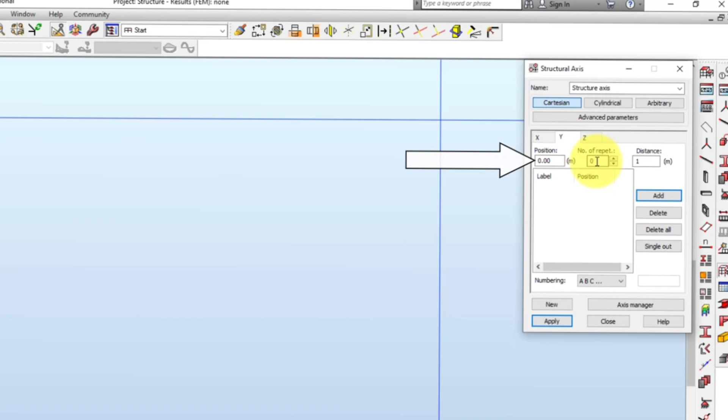Next, open the y-coordinate tab. Expand the numbering dropdown and select A, B, C. Under Position, leave the value at 0. Under Numbers of Repetition, set the value to 5. This will repeat the coordinate in the structure 5 times. Finally, under Distance, enter 9. This defines the distance between each point. Click Add. 5 values at 9 meters apart are listed.

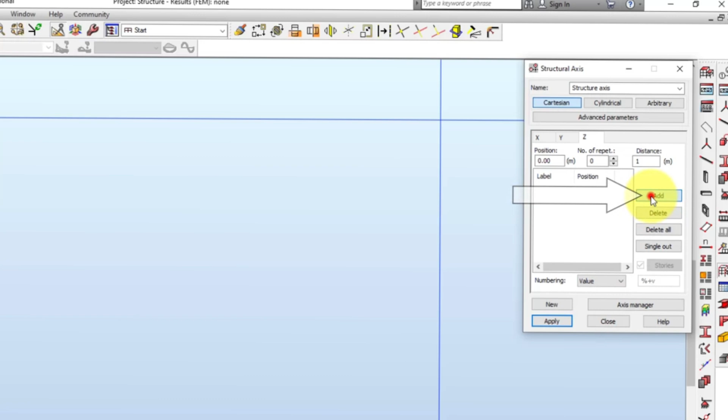Finally, open the Z-coordinate tab. Expand the numbering dropdown and select Value. Under Position, leave the value set to 0. Click Add. Next, under Position, enter 6.25. Click Add. Lastly, under Position, enter 7.5. By default, this distance is set to 1. Click Apply, and then click Close. The defined axes appear in the drawing area.

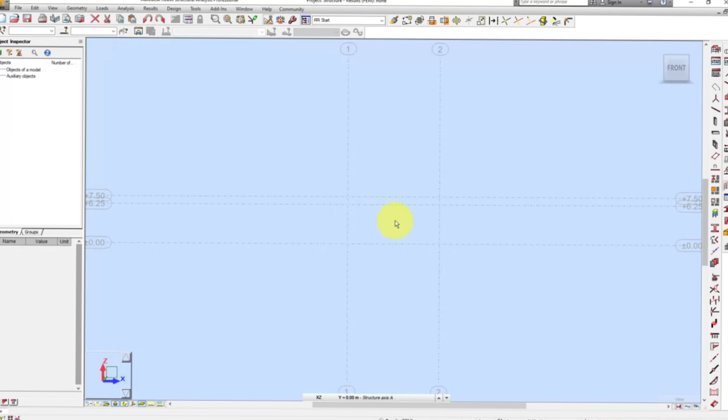From the View cube, select Front. From the text menu, select View, Projection, XZ. Next, using your scroll wheel, zoom into the drawing area. You now need to assign a section to the structure bars that will be defined. To open the Sections dialog, from the text menu, select Geometry, Properties, Sections. In the Sections dialog, click New Section. This displays the New Section dialog.

First, assign sections for columns. Expand the section type dropdown and select Steel. Under Section Selection, with the database set to UK sections, expand the Family dropdown and select UC for Universal Columns. Expand the section dropdown and select UC 305 by 305 by 97. Then click Add. Next, assign a section for rafters. Under Section Selection, expand the Family dropdown and select UB for Universal Beams. Expand the section dropdown and select UB 914 by 305 by 201.

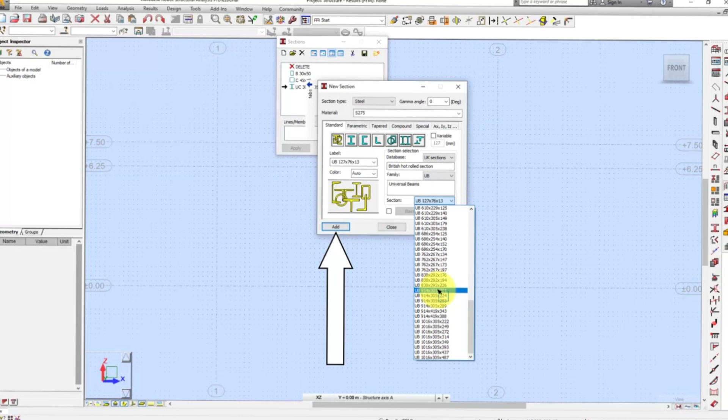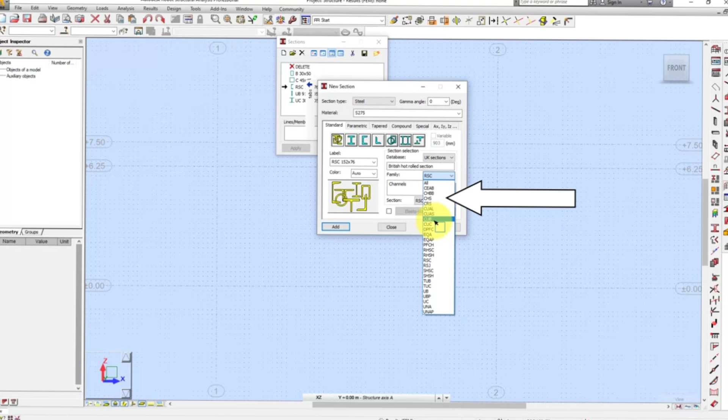Again, click Add. Next, assign a section for rolled steel channels. From the Section Selection, expand the Family dropdown and select RSC. Expand the Section dropdown and select RSC 152 by 76. Click Add. Next, assign a section for castellated universal beams. From the Section Selection, expand the Family dropdown and select CUB. Expand the Section dropdown and select CUB 305 by 102 by 23.

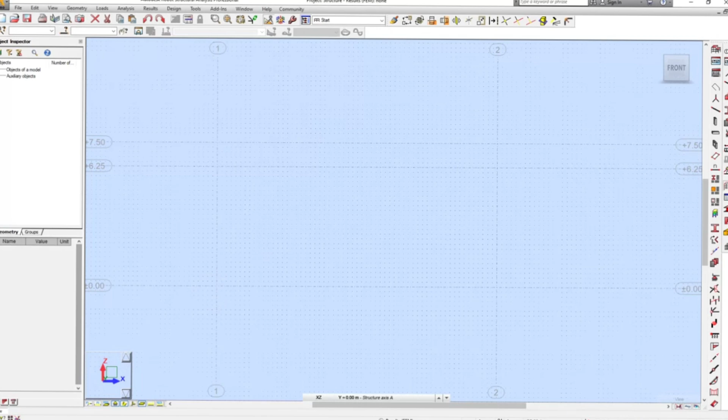Click Add. Finally, assign a section for a user-defined round bar. From the Section Selection, expand the Database dropdown and select User. Click Add and then click Close. Back in the Sections dialog, click Close. Once you are finished defining structural axes and assigning sections, your project is set up and the structure can be defined.